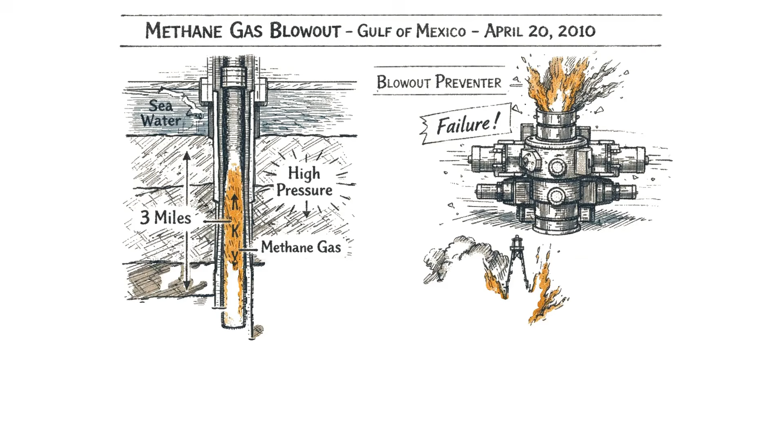On April 20, 2010, a column of methane gas shot through 3 miles of rock and ocean and detonated a drilling rig in the Gulf of Mexico. 11 men died in 7 minutes. Most people blame corporate greed, but the real killer was a physics equation that every engineer on that rig already knew the answer to. This is the science they ignored, and the pressure that always wins.

Number 1 is the pressure balance. Imagine holding your thumb over the end of a garden hose. Water pushes against your thumb constantly, trying to escape. Keep your thumb there and you're in control. Remove it and everything behind it comes screaming out.

That's exactly how a deep-water oil well works, except the garden hose is a column of steel pipe reaching 13,000 feet below the ocean floor. The water is methane gas that's been trapped in ancient rock for 60 million years, and your thumb is a column of heavy drilling fluid called mud. The entire time you're drilling a well, the weight of that mud is the only thing keeping oil and gas from rocketing up the pipe and onto your rig.

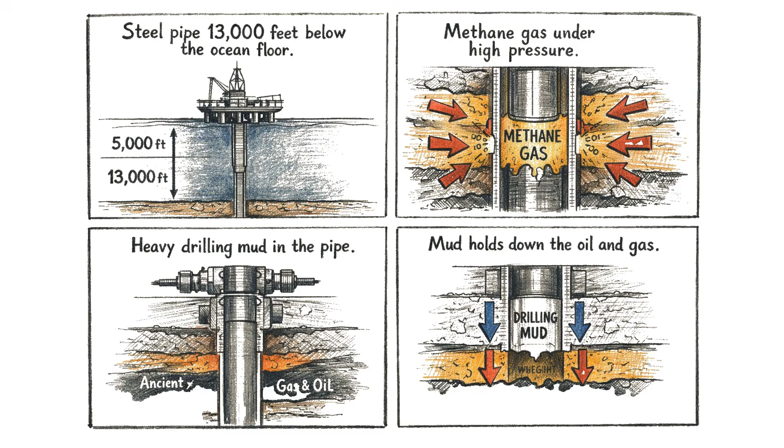Engineers call this hydrostatic pressure, and it's the single most important number in deep water drilling. Your mud has to push down harder than the formation pushes up. Too light and gas sneaks into the wellbore—that's called a kick. Too heavy and you fracture the rock and lose your mud into the formation.

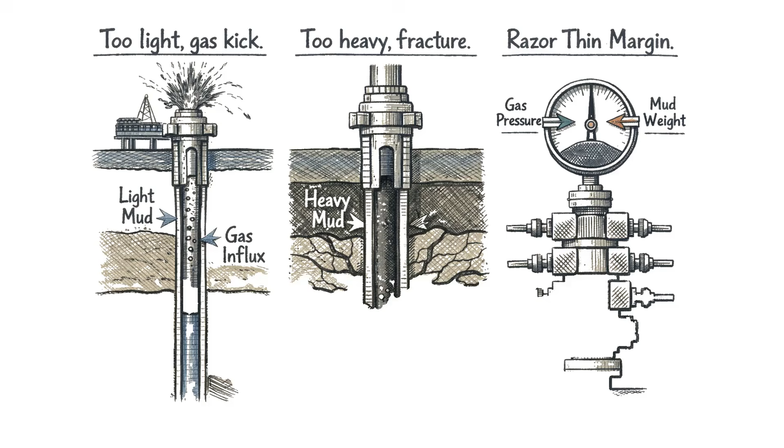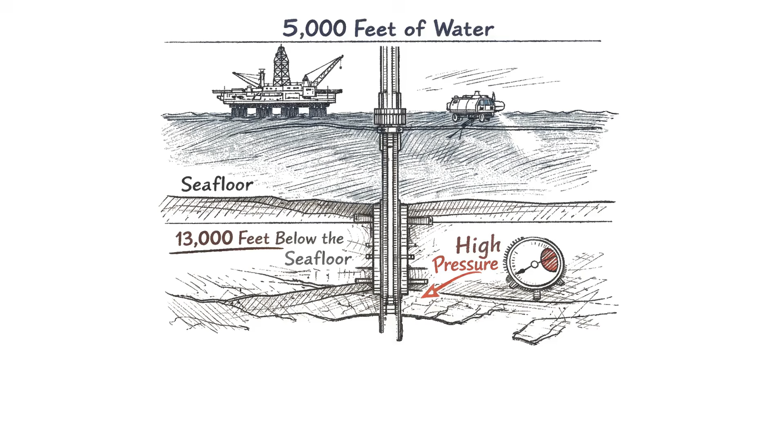At the Macondo well, the margin between those two disasters was razor thin. The well sat beneath 5,000 feet of ocean in the Gulf of Mexico. The target reservoir lay another 13,000 feet below the seafloor. At those depths, the formation pressure was enormous.

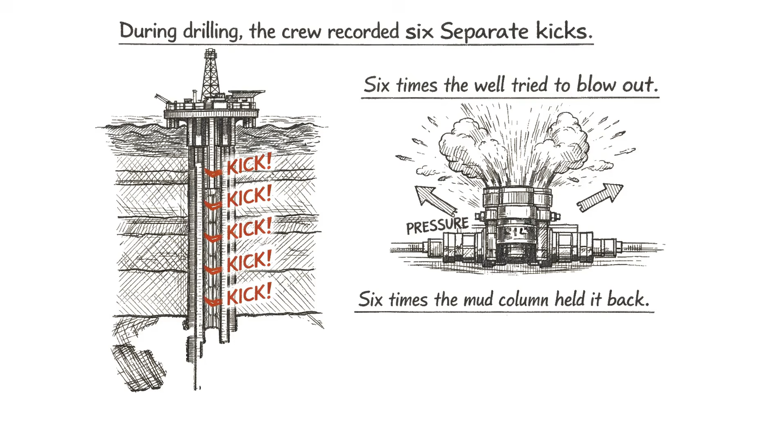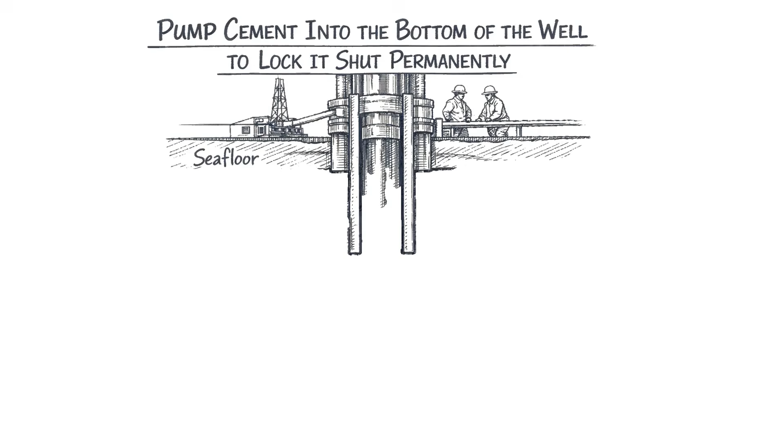During drilling, the crew recorded 6 separate kicks. 6 times the well tried to blow out. 6 times the mud column held it back. But drilling mud was never meant to be the permanent seal. Once drilling is complete, you pump cement into the bottom of the well to lock it shut permanently. That cement becomes your real thumb on the hose. And at the Macondo well, the cement never held.

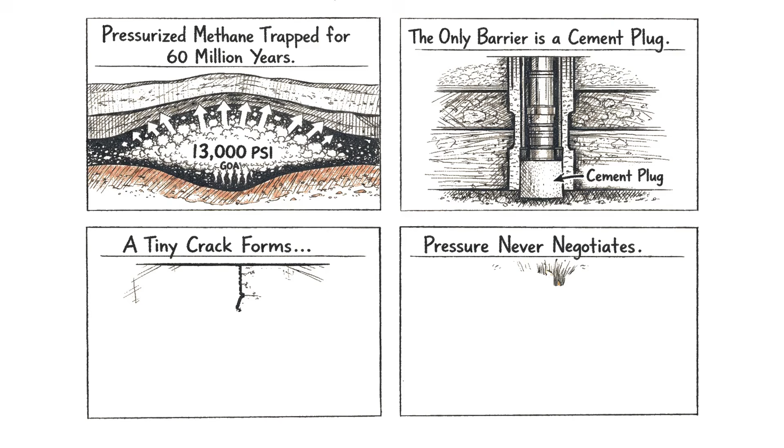Think about what that means for a moment. You have pressurized methane that's been trapped underground for 60 million years, pushing upward with roughly 13,000 pounds of force per square inch. The only permanent barrier between that gas and the ocean surface is a cement plug at the bottom of the well. If that plug develops even a single microscopic channel, the gas doesn't politely wait in line.

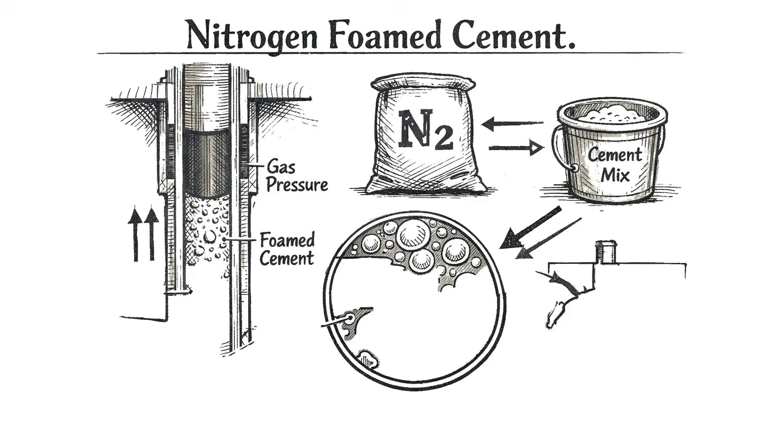It finds the gap and pushes through. Pressure never negotiates. But here's where the engineering turns reckless. Number 2 is the cement coffin. The cement pumped into the bottom of the Macondo well wasn't ordinary concrete. It was a specialized mixture called nitrogen-foamed cement, designed and mixed by a company called Halliburton.

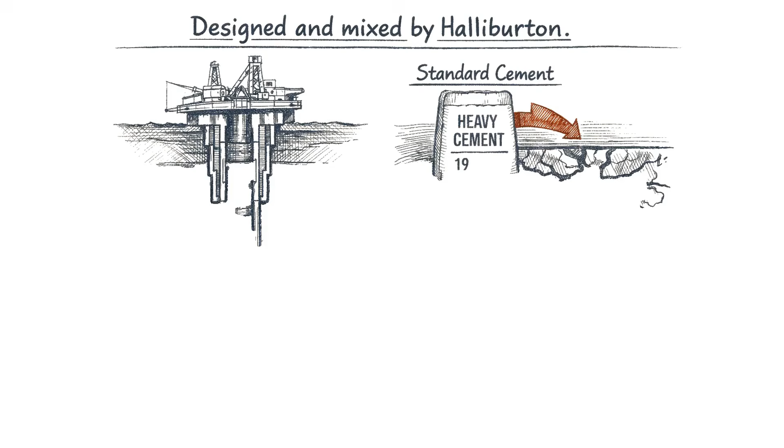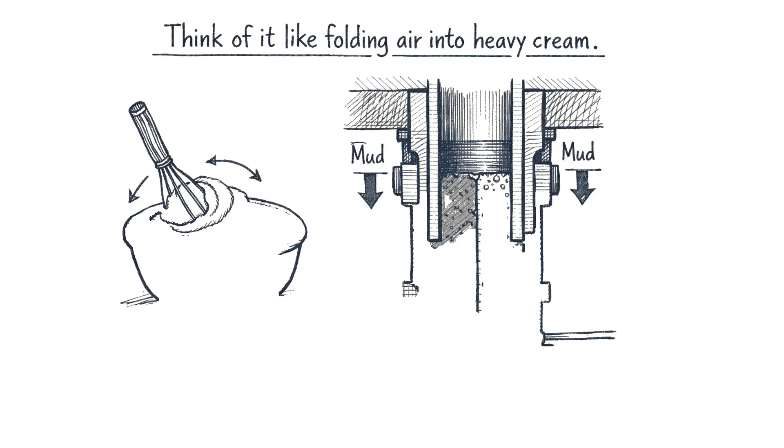Standard cement is too heavy for a well this deep. Pump dense cement into a fragile reservoir and it fractures the rock, draining into the formation instead of sealing the well. So engineers whip nitrogen gas into the mixture to lighten it. Think of it like folding air into heavy cream. Same volume, less weight. The foamed cement at Macondo was designed at 14.5 pounds per gallon, roughly 12% lighter than standard.

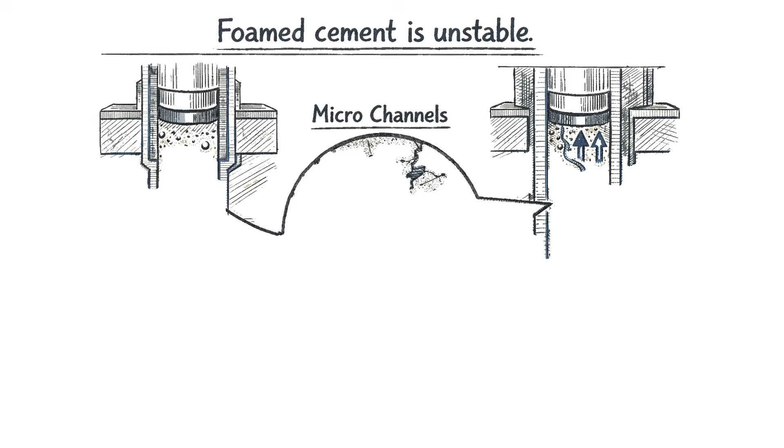The problem is that nitrogen-foamed cement is inherently unstable. Those tiny gas bubbles can migrate through the slurry before it sets, carving microscopic channels through the finished plug, and those channels become highways for methane.

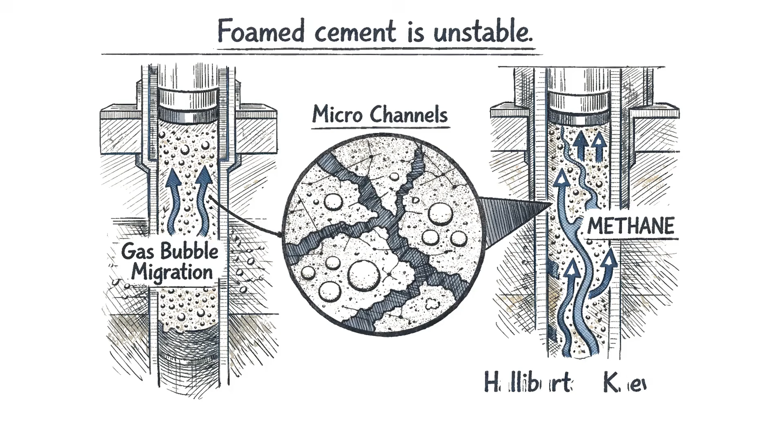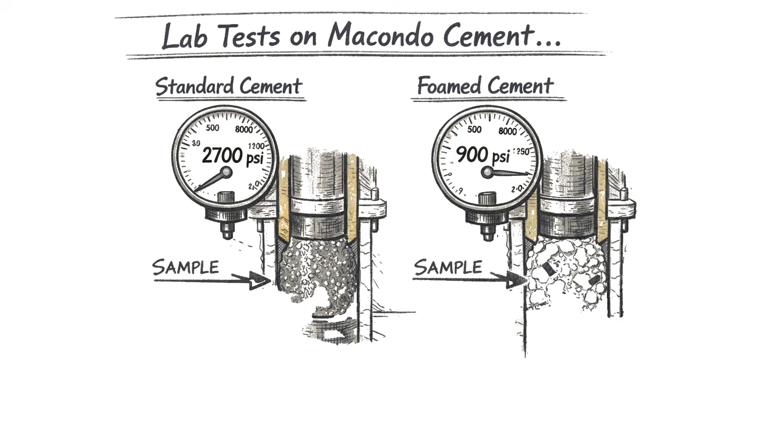Halliburton knew this. Weeks before the blowout, their engineers ran laboratory tests on the exact cement formula planned for the Macondo well. The results were alarming. Standard cement in those tests reached a compressive strength of 2,700 pounds per square inch. The nitrogen-foamed version barely hit 900, 1/3 the holding power. Halliburton had those results in hand before the cement job even started.

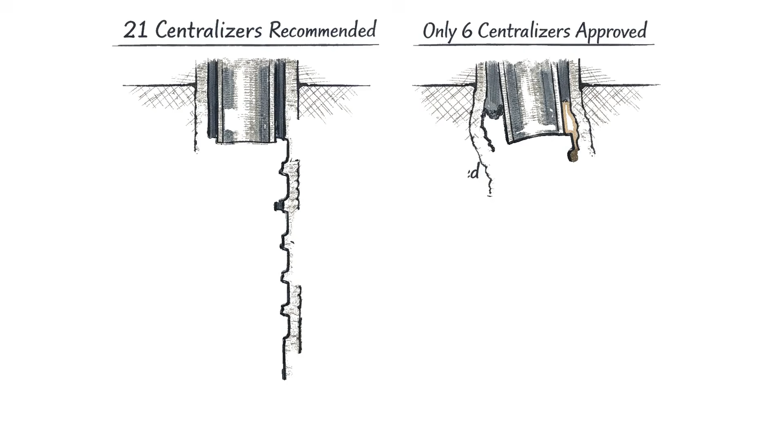They pumped it anyway. On top of the cement itself, Halliburton's own computer simulations had recommended 21 centralizers, metal sleeves that keep the pipes centered in the hole so cement flows evenly on all sides. Uncentered pipe means uneven cement, which means thin spots, which means channels for gas.

BP approved only 6 centralizers. A BP engineer wrote in an internal email on April 16, 2010, it'll take 10 hours to install them. By that point, BP was $58 million over budget and 43 days behind schedule on the Macondo well. 10 hours felt like too long to wait. Here's a number worth sitting with.

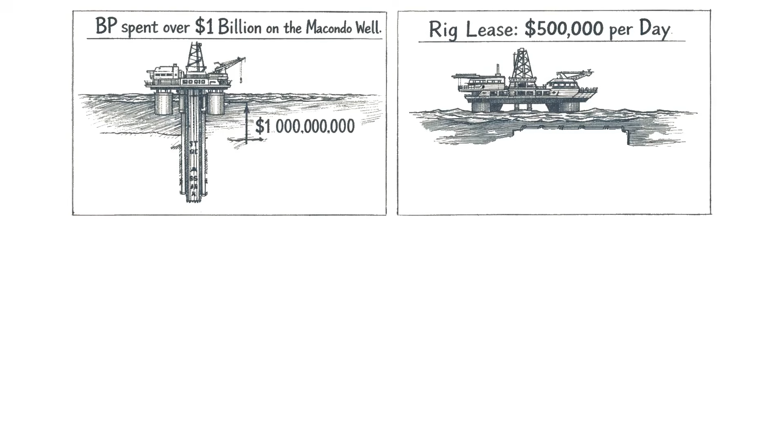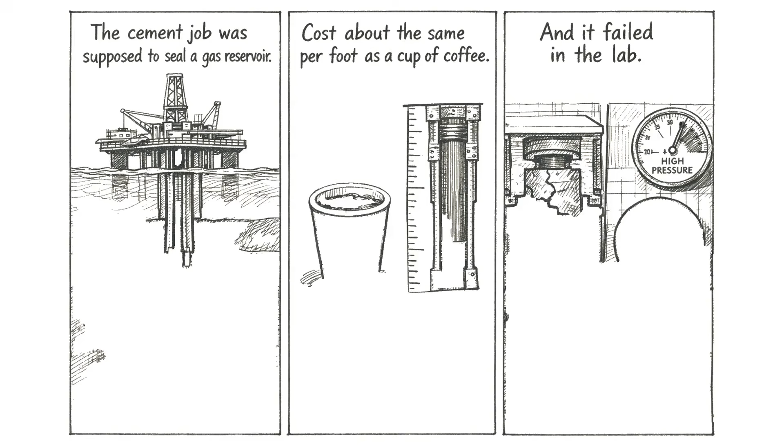BP had spent over $1 billion drilling the Macondo well. The rig lease alone cost roughly $500,000 per day. Those 10 hours of centralizer installation were worth about $200,000 - that's 0.02% of the total well cost. The cement job that was supposed to permanently seal a reservoir of pressurized methane gas cost roughly the same per foot as a cup of coffee, and it had already failed in the lab.

Actually, the cement wasn't the last chance to stop the disaster. There was one more test and one more chance to walk away. Number 3 is the pressure lie.

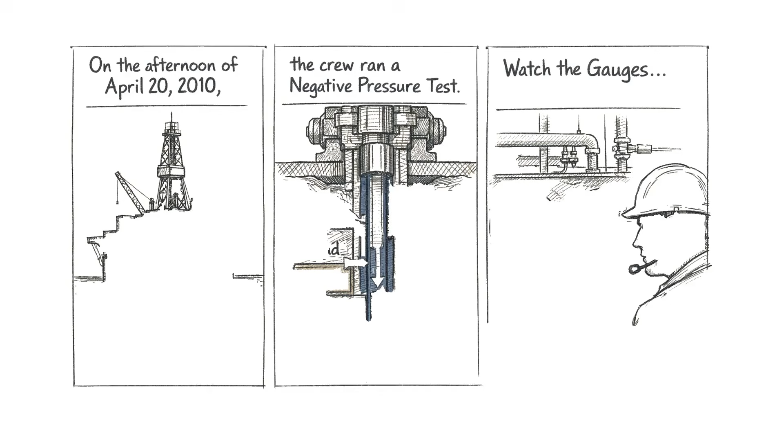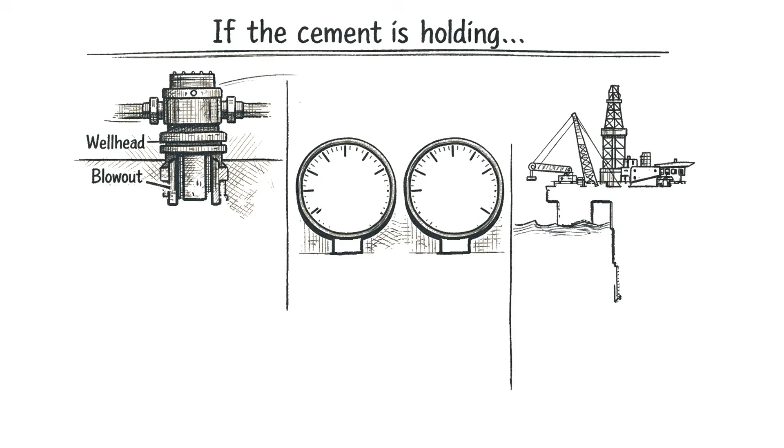On the afternoon of April 20th, 2010, the crew of the Deepwater Horizon ran what's called a negative pressure test. This is the moment of truth for any deepwater well. You reduce the hydrostatic pressure inside the drill pipe and watch the gauges. If the cement at the bottom is holding, the pressure reading should bleed down to 0 and stay there. 0 means the well is sealed. 0 means safe. 0 means you can displace the heavy mud and walk away.

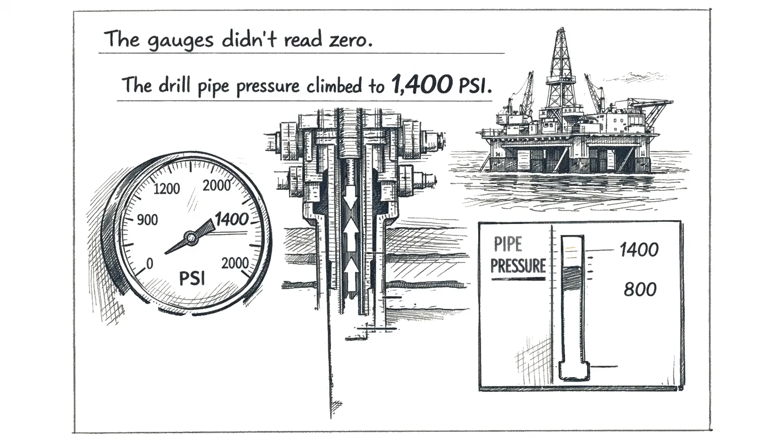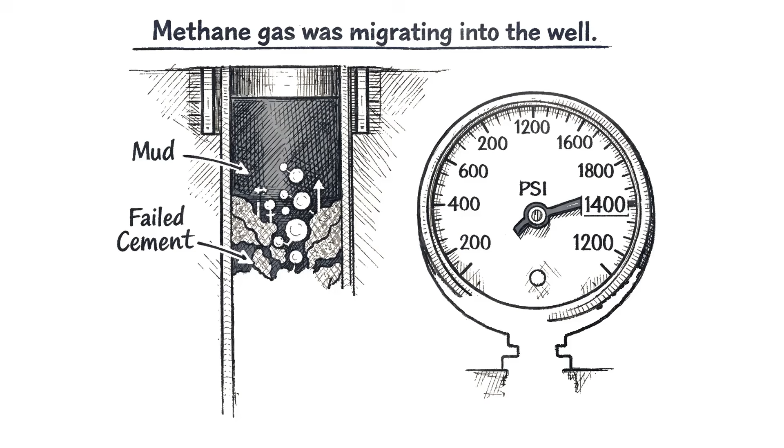The gauges didn't read 0. The drill pipe pressure climbed to 1,400 pounds per square inch. That reading meant only one thing: methane was migrating through the failed cement and entering the wellbore. The cement had failed, and the instruments were telling everyone in the room exactly that.

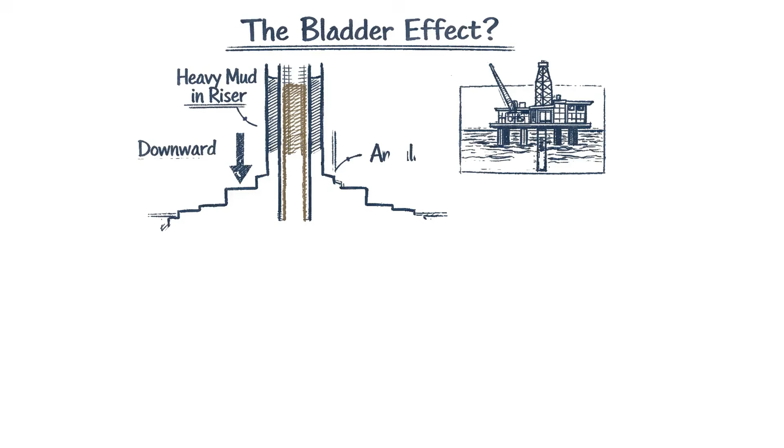Jimmy Harrell, the senior Transocean rig supervisor, challenged the result. Something was clearly wrong. BP's company man on the rig, Don Vidrine, was uncertain about what the reading meant and called onshore engineers for guidance. Then someone offered an alternative explanation, the Bladder Effect. The theory was that heavy mud sitting in the riser above the blowout preventer was pushing down on the annular preventer, creating a false reading. It sounded plausible, except the Bladder Effect doesn't produce 1,400 pounds per square inch on the drill pipe.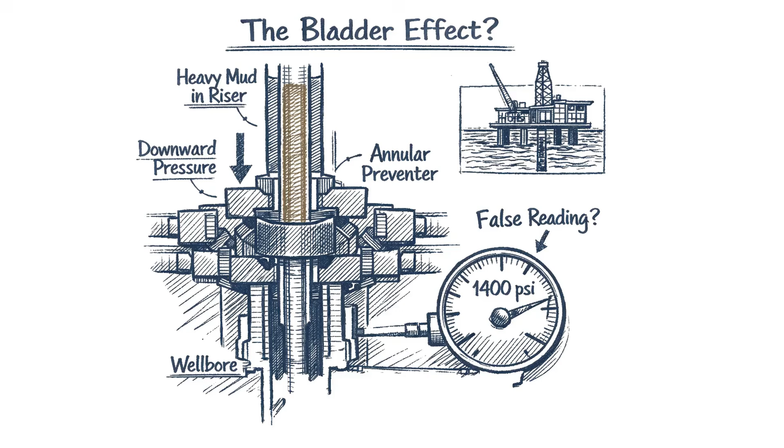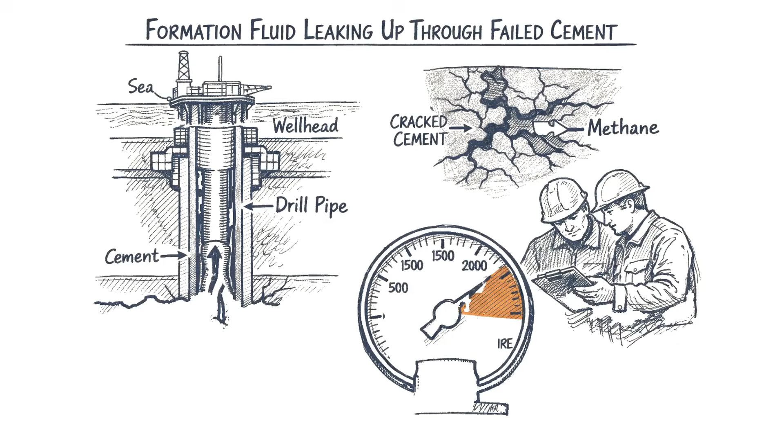Every federal investigator who later examined the data confirmed that the only possible source of that pressure was formation fluid, almost certainly methane, leaking up through failed cement at the bottom of the well. But the crew accepted the explanation. At approximately 8 p.m., they began displacing the heavy drilling mud from the riser with lighter seawater. The cement that Halliburton knew was unstable, the cement that had just failed the negative pressure test, was now the only barrier between a pressurized methane reservoir and 11 men standing directly above it.

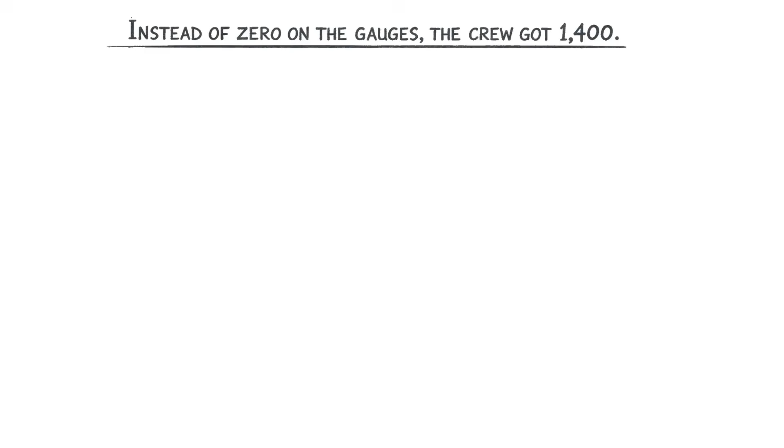Instead of 0 on the gauges, the crew got 1,400. Instead of stopping, they displaced the mud. And then the well answered. Number 4 is the 9-minute warning.

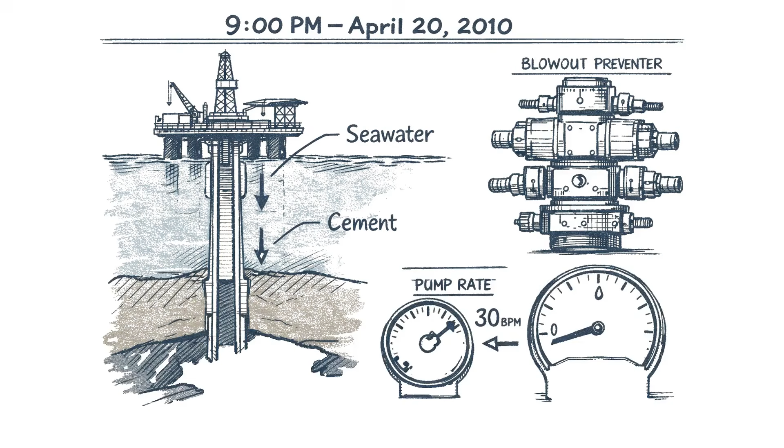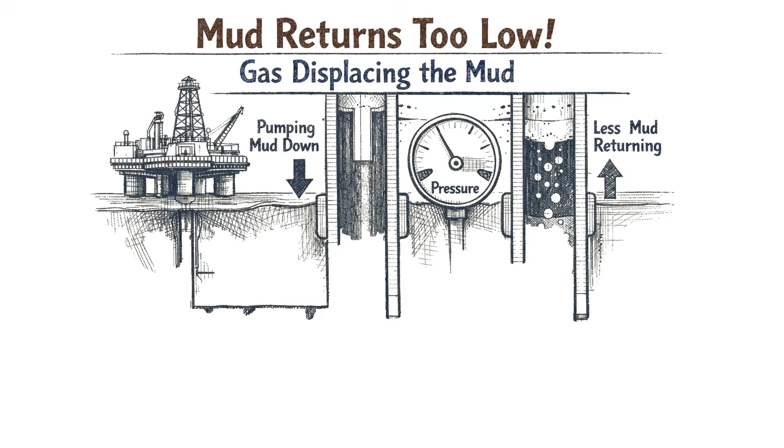At 9 p.m. on April 20th, the mud displacement was running smoothly. Seawater replaced the heavy drilling fluid in the riser exactly as planned. For roughly 30 minutes, nothing appeared wrong on the surface. Below the seafloor, methane was silently migrating through the cracked cement and flooding into the wellbore. The mud returns should have been the first red flag. Less fluid was coming back up the pipe than was being pumped down. In any drilling textbook on Earth, that means gas is displacing your mud. That's a kick. Nobody caught it in time.

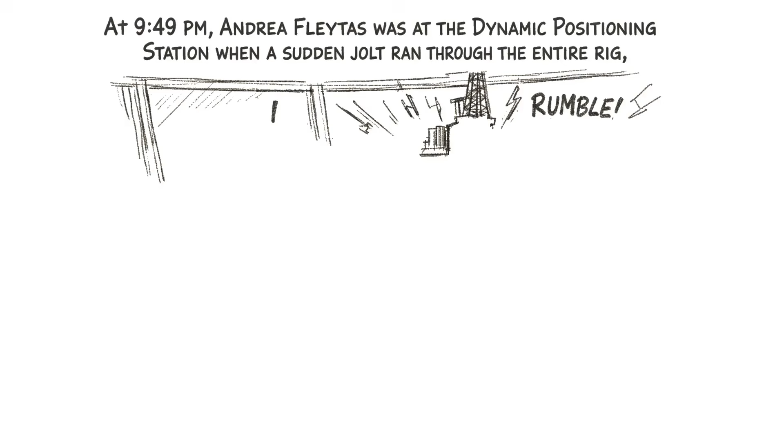At 9:49 p.m., Andrea Fleytas was at the dynamic positioning station on the bridge when a sudden jolt ran through the entire rig. Her screens flooded with Magenta warnings. Magenta is the highest alert level for combustible gas on the platform. The methane had reached the surface.

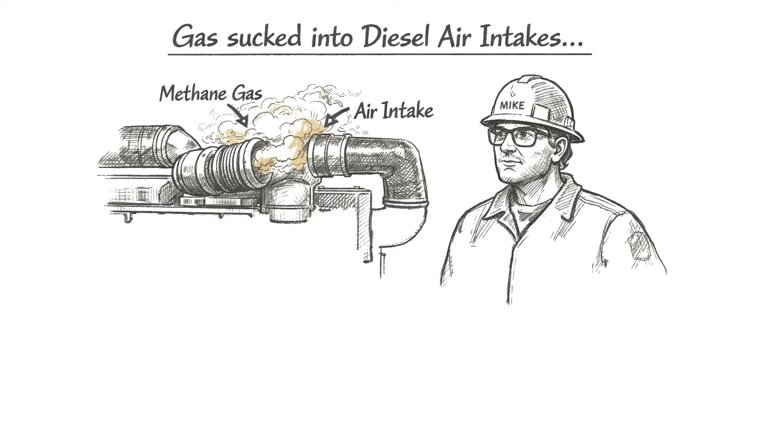In the engine room, gas was being sucked into the air intakes of the diesel generators. Mike Williams, the chief electronics technician, heard the engines begin to rev far past their normal operating limits. Diesel engines do something terrifying when they ingest methane. They run away. The gas itself becomes additional fuel, and no throttle can stop outside air from feeding the acceleration because the fuel is coming in through the air intake, not the fuel line. Williams watched the lights on the rig surge so bright they physically exploded in their fixtures.

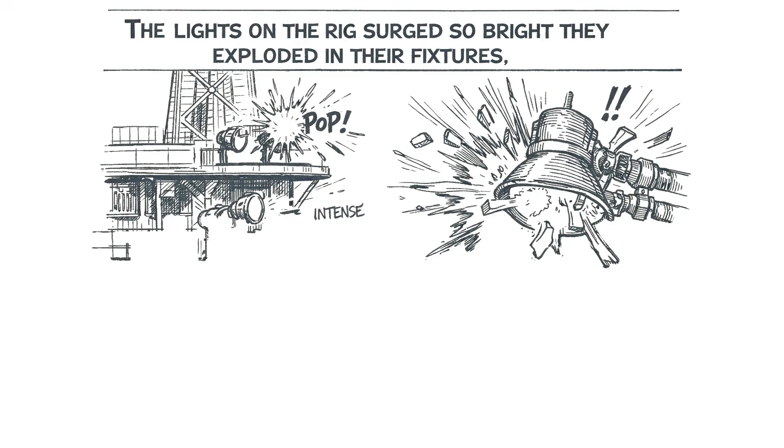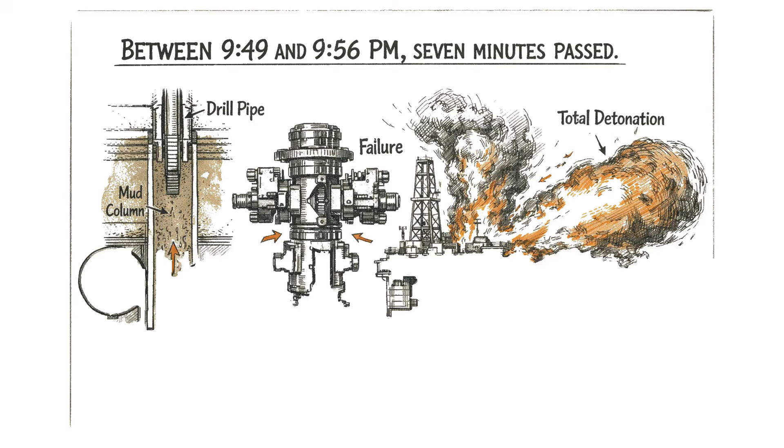Then came the first explosion. Then a second, far larger blast. A fireball ripped through the derrick and swallowed the entire platform in flames. Between 9:49 and 9:56 p.m., 7 minutes passed - 7 minutes from the first jolt to total detonation.

Jason Anderson, the senior tool pusher, was 35 years old with 2 young children. Shane Roshto was 22. Adam Weise was 24. Roy Wyatt Kemp was 27, a derrick hand with a 2-year-old daughter named Kaylee and another daughter his wife Courtney was still carrying.

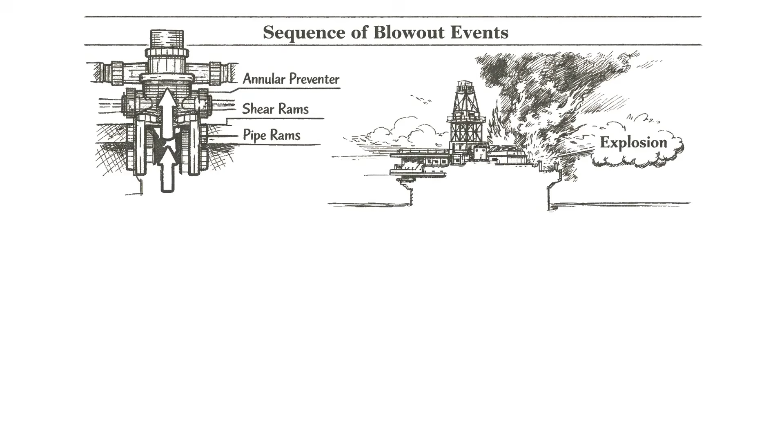They and 7 others were never found. Mike Williams, blinded by blood from shrapnel wounds to his forehead, stumbled through the burning wreckage to the edge of the rig. He looked down at a 10-story drop into the dark Gulf of Mexico, roughly 100 feet of open air between his boots and the black water below. Fire at his back, nothing below.

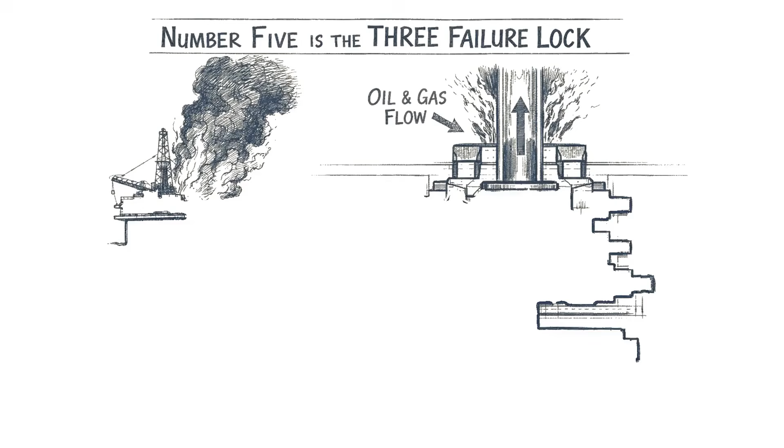He jumped. But even after 11 men were dead and the rig was engulfed in flames, there was still one final system designed to stop the well from flowing. Number 5 is the three failure lock.

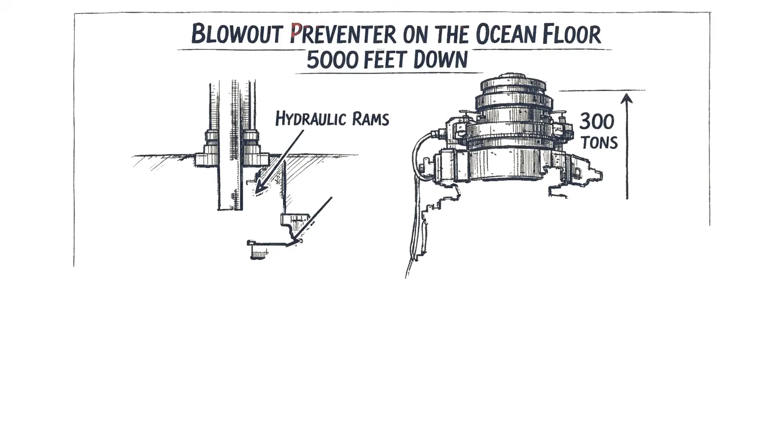Bolted to the wellhead on the ocean floor, 5,000 feet below the burning platform, sat the blowout preventer. It weighs 300 tons and stands 5 stories tall, a stack of hydraulic rams and pipe seals that represents the last line of defense in offshore drilling.

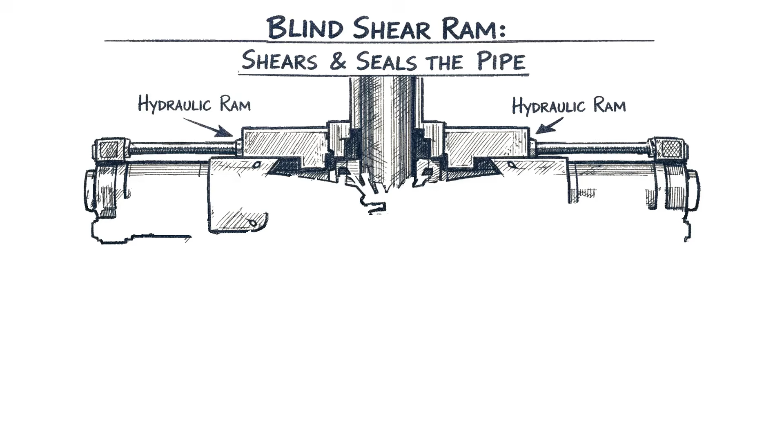At its core is a mechanism called the blind shear ram, 2 enormous steel blades designed to slam together, shear clean through the drill pipe, and seal the well shut in seconds. If the cement fails, if the mud is displaced, if the crew misses every kick warning, the blowout preventer is supposed to end the emergency before it becomes a catastrophe.

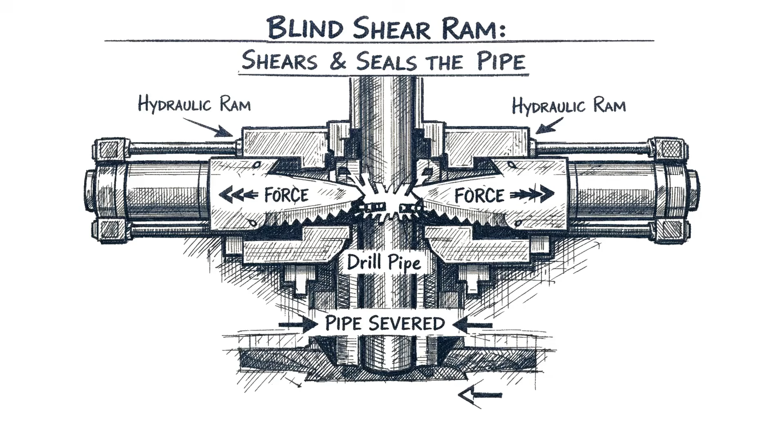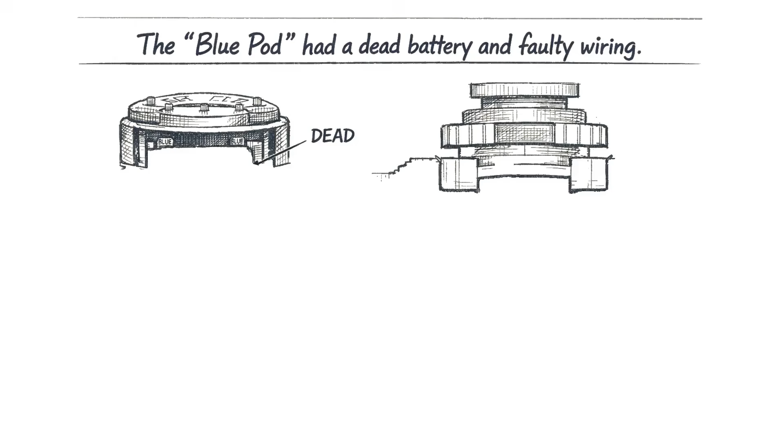On the night of April 20th, it failed 3 separate ways at the same time. First, one of its 2 redundant emergency control pods, designated the blue pod, had a dead battery and faulty wiring. That pod couldn't transmit the signal to activate the shear ram.

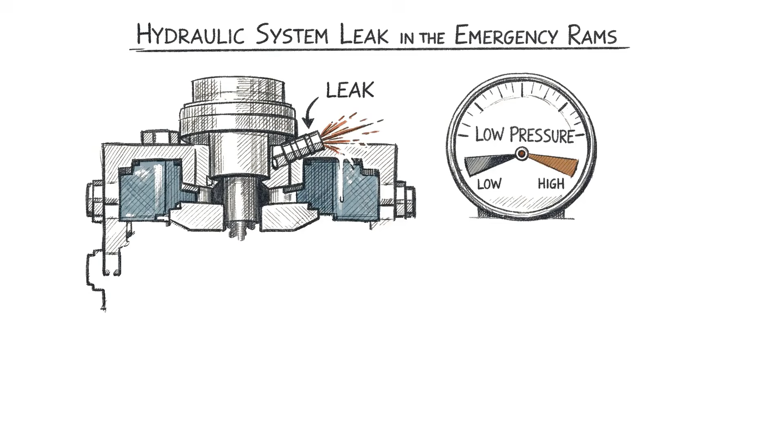Second, the hydraulic system that provides emergency force to the rams had a significant leak, which meant that even if the signal arrived, the rams might not have had enough force to close completely.

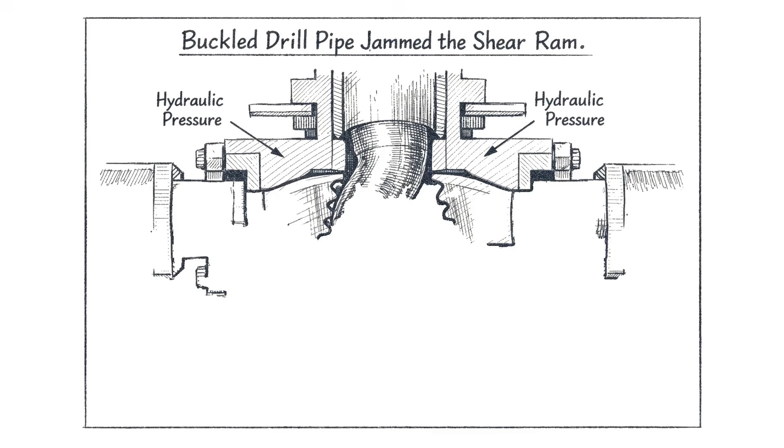But the third failure is the one that sealed the well's fate. When the blind shear ram likely did activate through the remaining control pod, it encountered a section of drill pipe that had buckled under the extreme forces of the blowout.

A straight pipe shears cleanly between the blades. A buckled pipe wedges sideways and jams them open. The offshore drilling industry didn't fully understand this failure mode until after the federal investigation.

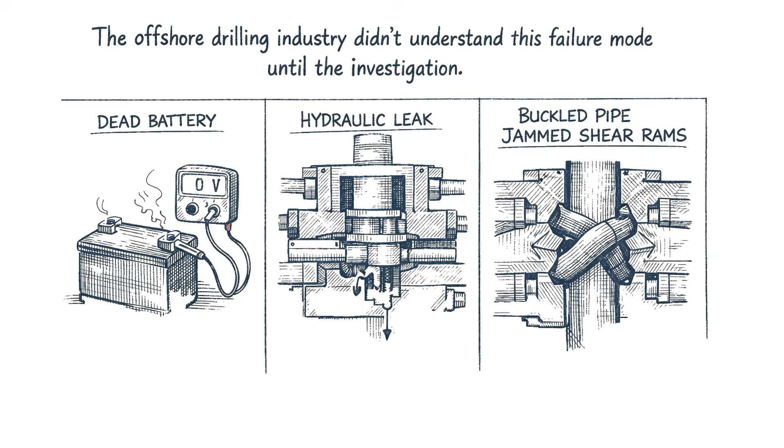The 300-ton device designed to be the absolute last resort, the fail-safe that justified every other risk taken on the Macondo Well, had a dead battery, a hydraulic leak, and a pipe geometry that no engineer had ever modeled. 3 independent failures in a single device at the single moment it was supposed to work. Turns out the explosion was only the beginning.

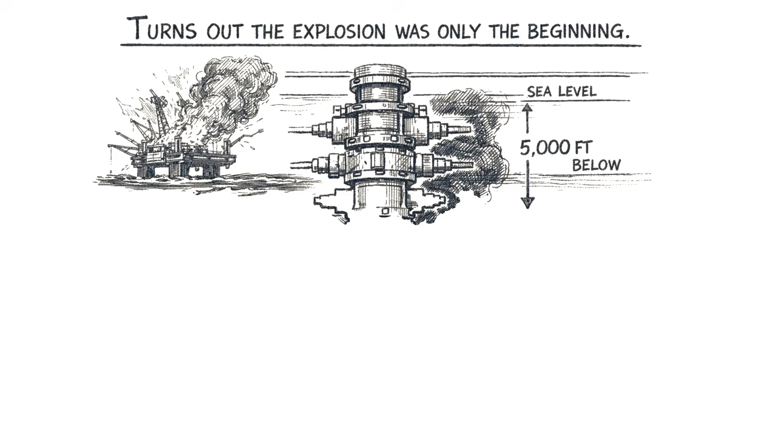Number 6 is the invisible poison. The Deepwater Horizon sank on April 22nd, 2 days after the blast, but the well at the bottom of the ocean kept flowing. For 87 days, crude oil poured from the broken wellhead at roughly 62,000 barrels per day. By the time engineers finally capped it on July 15, 2010, an estimated 4.9 million barrels of crude had entered the Gulf of Mexico. That's roughly 206 million gallons, enough oil to fill over 300 Olympic swimming pools.

The response was massive. More than 47,000 personnel and nearly 7,000 vessels were deployed across the Gulf. But the most controversial decision was the use of chemical dispersants. BP and the Coast Guard sprayed nearly 1.84 million gallons of a product called Corexit onto the ocean's surface, and for the first time in history, injected it directly at the broken wellhead 5,000 feet underwater.

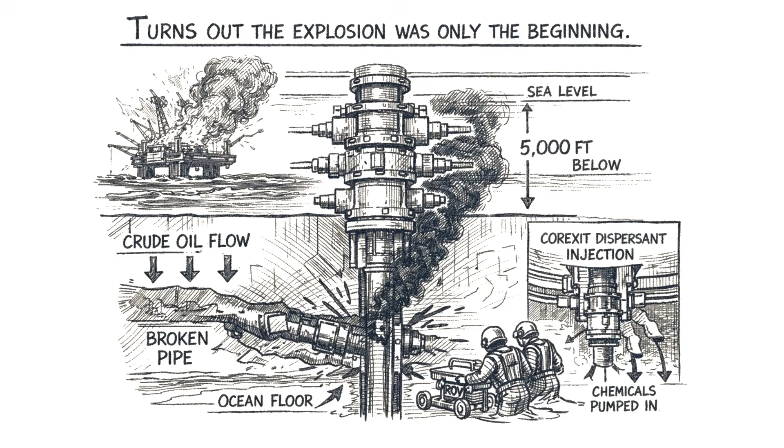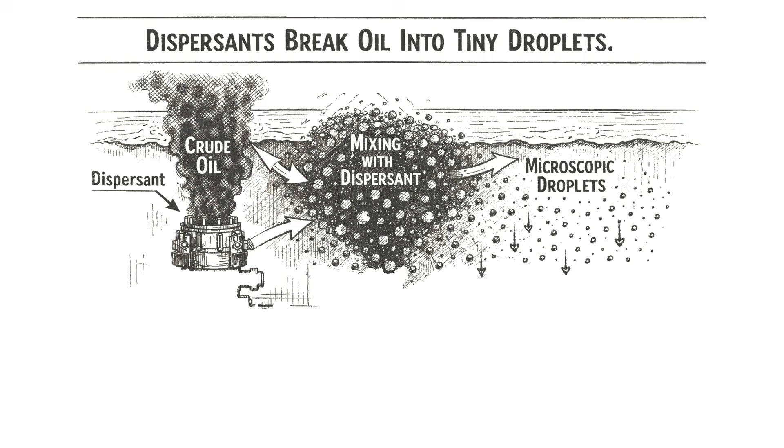Here's what dispersants actually do. They don't remove oil from water. They break crude oil into microscopic droplets that sink below the surface and spread through the water column. The slick disappears from satellite images. The beaches look cleaner on the evening news, but the oil isn't gone. It's invisible. And invisible turned out to be far worse than visible.

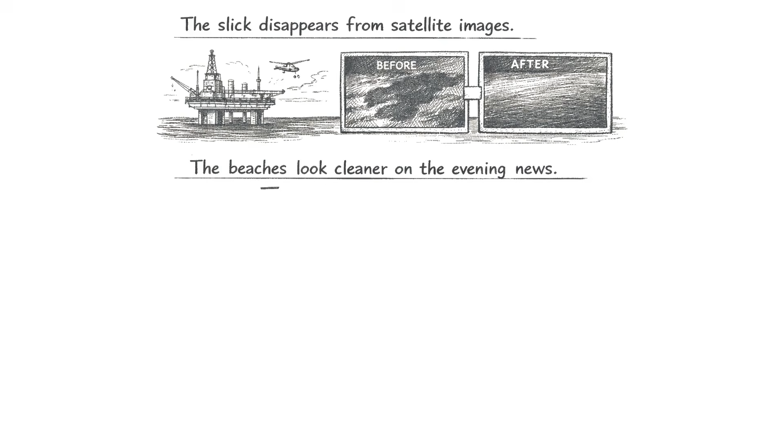Researchers from Georgia Tech published findings in the journal Environmental Pollution showing that the combination of Corexit and crude oil was up to 52 times more toxic to marine organisms than the crude oil by itself. The dispersant weakens cell membranes in marine life, allowing the oil's most poisonous compounds to penetrate living tissue far more easily. Scientists at the Woods Hole Oceanographic Institution later discovered deep-sea plumes of dispersed oil stretching at depths of 3,000 to 4,000 feet, suspended in the water column like an invisible fog that no cleanup crew could ever reach.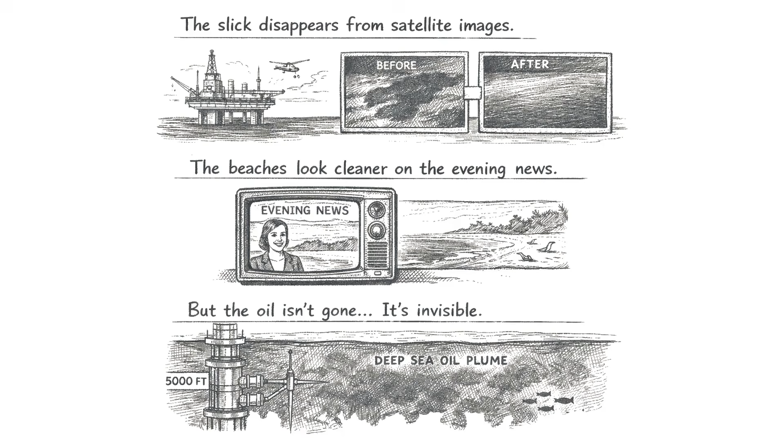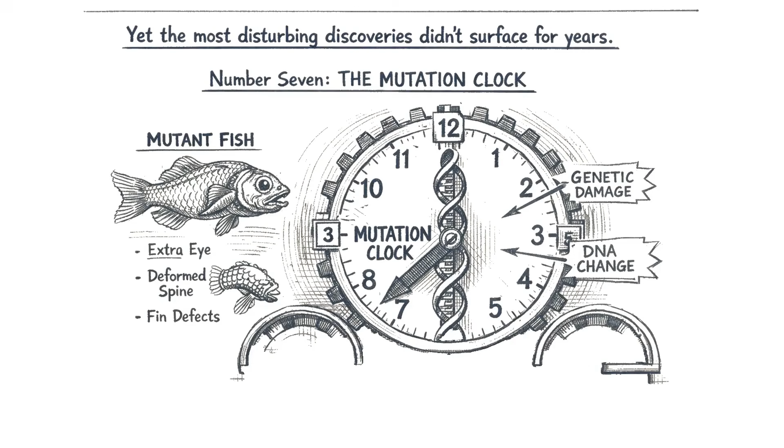The surface looked clean. Everything below was poisoned. Yet the most disturbing discoveries didn't surface for years. Number 7 is the Mutation Clock. The Gulf of Mexico didn't die after the Deepwater Horizon spill, but it didn't recover either. It changed at the molecular level.

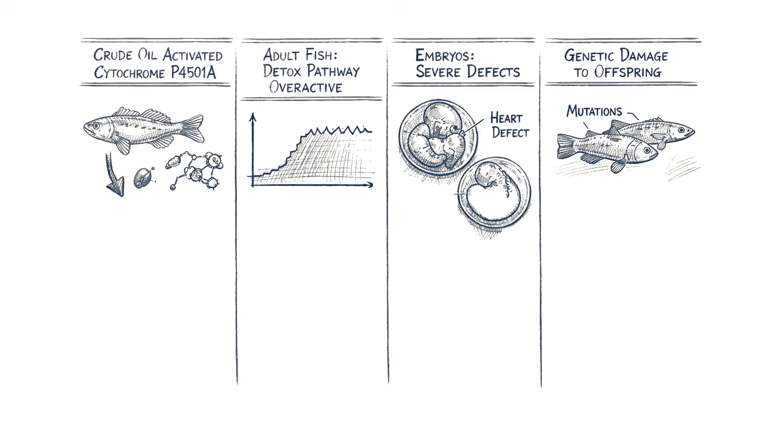Researchers studying Gulf killifish, small fish that inhabit the coastal marshes where the oil made landfall, found something unsettling. The crude oil activated a molecular signaling pathway called cytochrome P4501A, the same system your body uses to break down toxins and foreign chemicals. In adult fish, this detox pathway went into overdrive and stayed elevated for more than a year after the oil arrived.

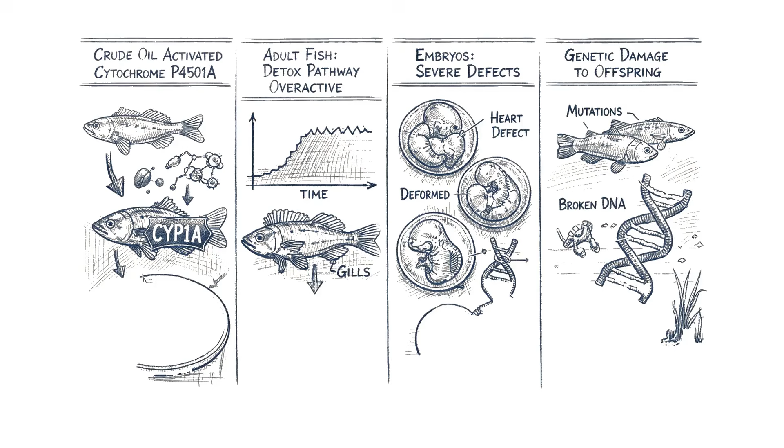But in their embryos, the exact same activation caused developmental defects. Offspring of exposed killifish showed cardiac abnormalities, disrupted gene expression across their liver and gill tissue, and direct evidence of damage to their genetic code at the cellular level. These weren't temporary effects that faded with the oil. The crude had rewritten the biological programming of an entire generation of fish.

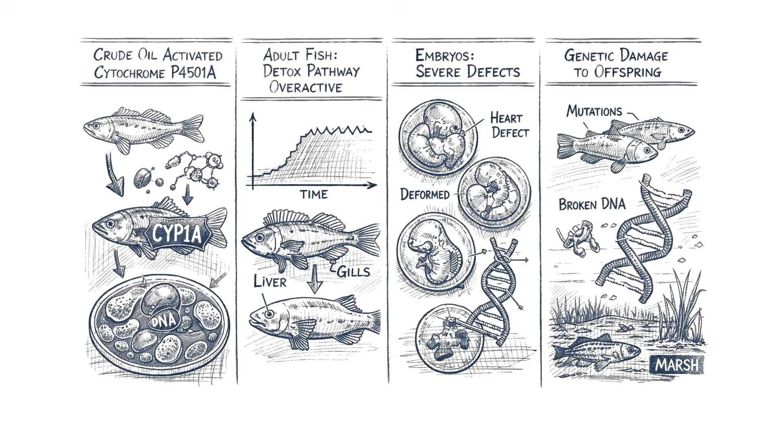And the damage reached far deeper than the marshes. Scientists studying deep-sea coral colonies more than 4,000 feet below the surface found them coated in a brown film containing both crude oil and dispersant residue. Gene expression analysis revealed dramatic changes in the coral's immune response, wound repair systems, and ability to metabolize foreign compounds. 7 years after the spill, injured coral colonies were still losing branches at significantly higher rates than healthy ones nearby. The recovery timeline wasn't months or years, it was decades, if recovery comes at all.

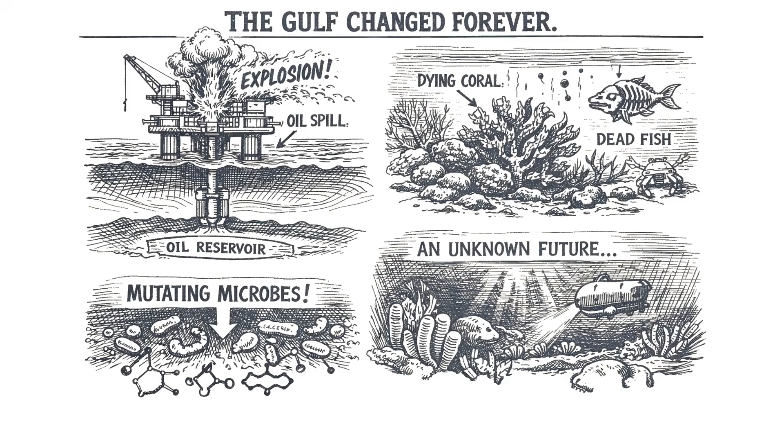Meanwhile, microbial communities in the Gulf's deep sediments did something no one predicted. They evolved. New populations of bacteria emerged that could consume hydrocarbon compounds settled on the ocean floor. The Gulf's ecosystem didn't bounce back to its state before 2010. It became something entirely new. And no researcher alive today can tell you what that transformed ecosystem will look like in another 50 years.

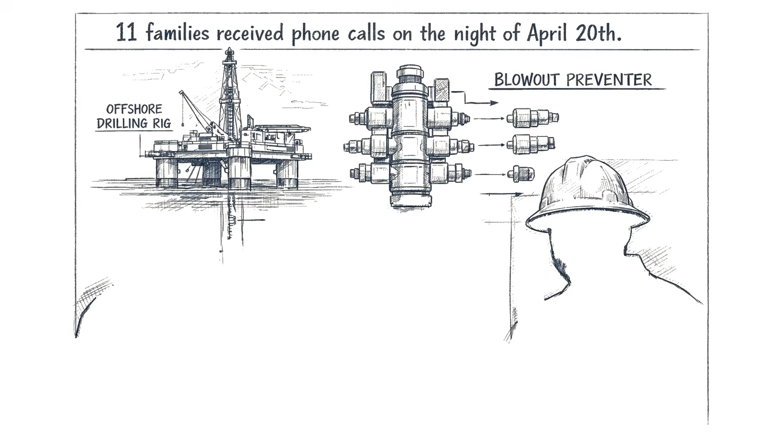11 families received phone calls on the night of April 20th. Courtney Kemp was 25 years old when she learned her husband Wyatt, a 27-year-old derrick hand, was among the 11 who would never come home. Their daughter Kaylee was 2. Their daughter Madison hadn't been born yet.

Dale Burkeen had worked as a crane operator on the Deepwater Horizon for 10 years. He was 37. Gordon Jones was a drilling fluid specialist, just 28. His wife Michelle was pregnant with their second son when he died.

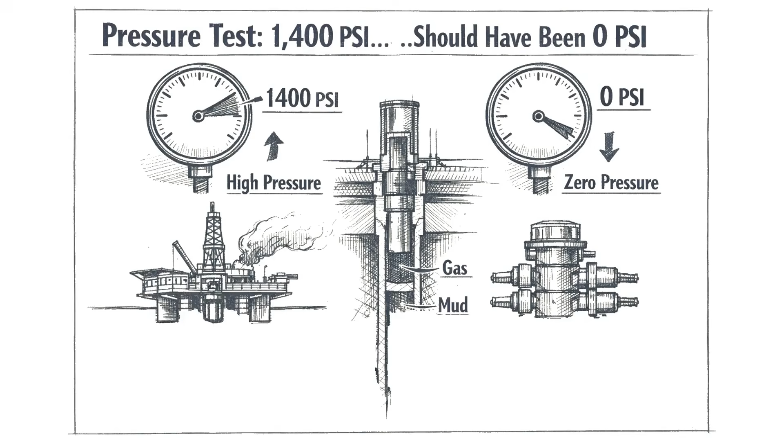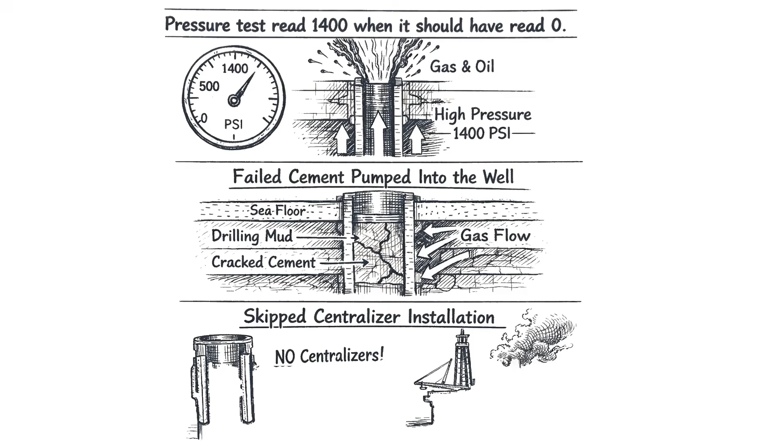None of them were killed by a freak accident. They died because a pressure test read 1400 when it should have read 0, and someone called it the Bladder Effect. They died because cement that had already failed in Halliburton's lab was pumped into a well anyway. They died because 10 hours of centralizer installation felt too expensive on a project that had already cost $1 billion.

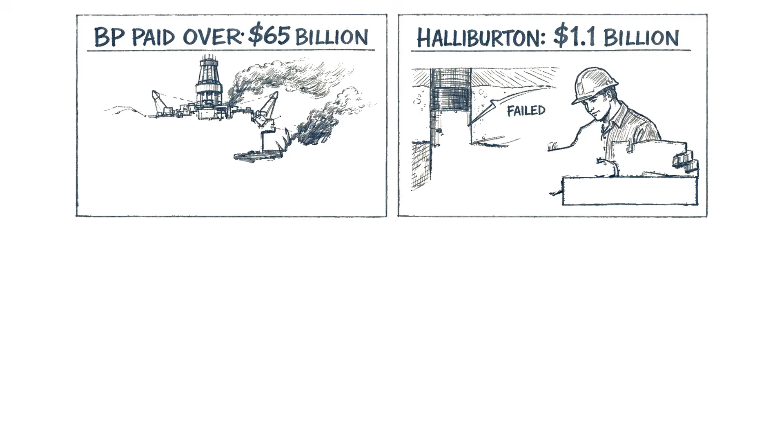BP would eventually pay more than $65 billion in fines and settlements, the largest environmental penalty in American history. Halliburton settled for $1.1 billion. Transocean paid $1.4 billion. Those are staggering numbers, and they don't bring a single person home for dinner.

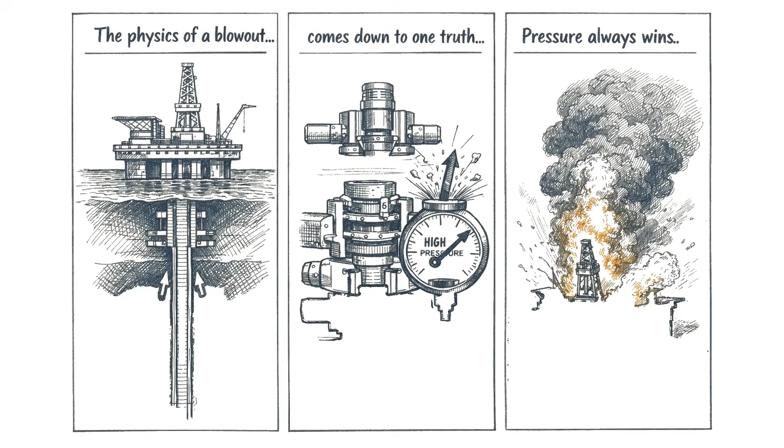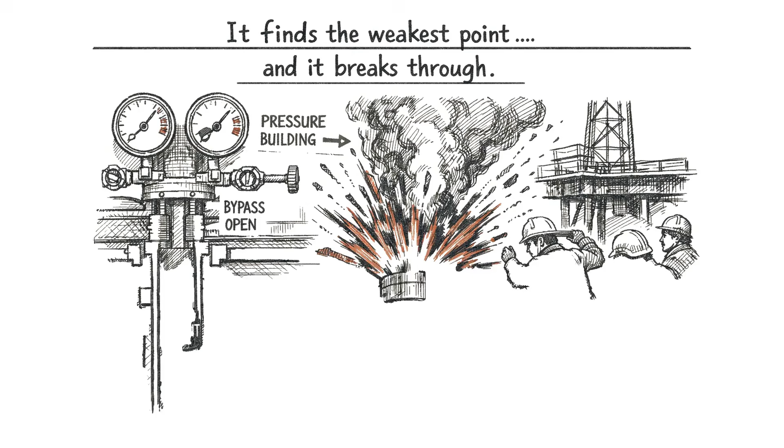The physics of a blowout comes down to one truth the drilling industry has understood since the first well was drilled. Pressure always wins. You can hold it back with mud, you can try to seal it with cement. You can build 300-ton machines to shear it shut as a last resort. But if you ignore the gauges, cut the barriers, and remove the weight before the seal is proven, pressure does what it's always done. It finds the weakest point and it breaks through. And the weakest point is never the rock. It's the decision made by the person standing above it.